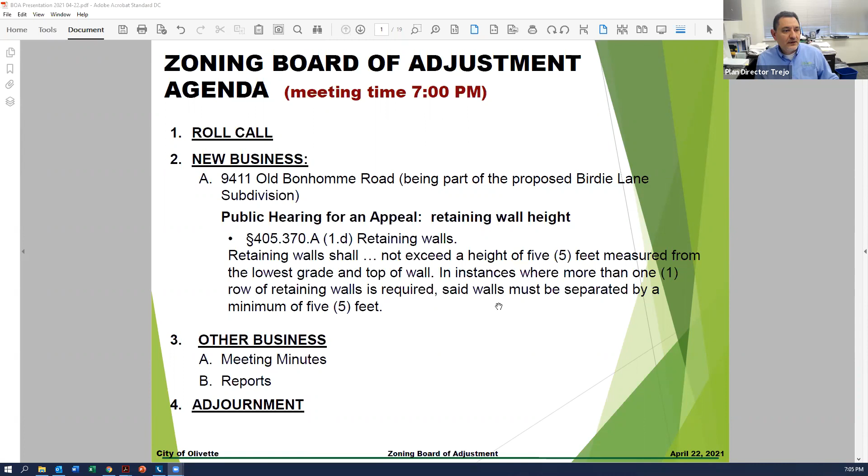Got it. All right, we have procedures both for virtual meetings and the Zoning Board of Adjustment. For virtual meetings, you can participate via Zoom or live stream. There's an opportunity for public comments prior to each vote. We ask anybody in the public to raise their hand for recognition - that's anybody outside of the petitioners. I will transfer you over as a panelist at the chair's request. Comments are limited to 3 minutes. When you speak before the board, please note your name and address.

The city urges you to have your video on when you speak. Public comments may be submitted in writing and read aloud by staff, and there may be a short delay in the live stream depending on your connection. For presentations from the applicants or petitioners, all reports and plans are accessible via the links on the agenda. Staff provides an overview, the developer addresses staff's comments and board questions, and all votes are now conducted as roll call votes, which is traditional with the Board of Adjustment.

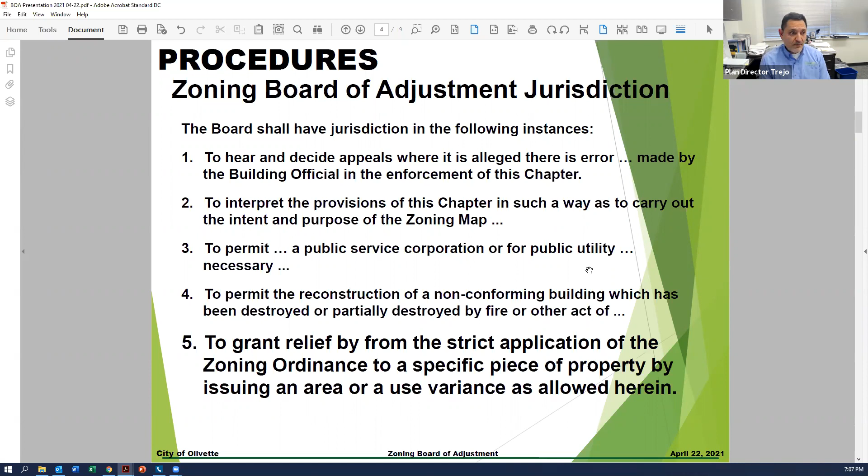Just a reminder for the board members regarding the procedures for the Zoning Board of Adjustment. You have jurisdiction to make decisions when there's an alleged error made by the building official in the enforcement of the code, to interpret provisions which conflict with the zoning map, to permit public service utilities, to permit reconstruction of non-conforming structures which have been damaged or destroyed, and more importantly, to grant relief from the strict application of the zoning ordinance to a specific piece of property by issuing an area or use variance as allowed within the code.

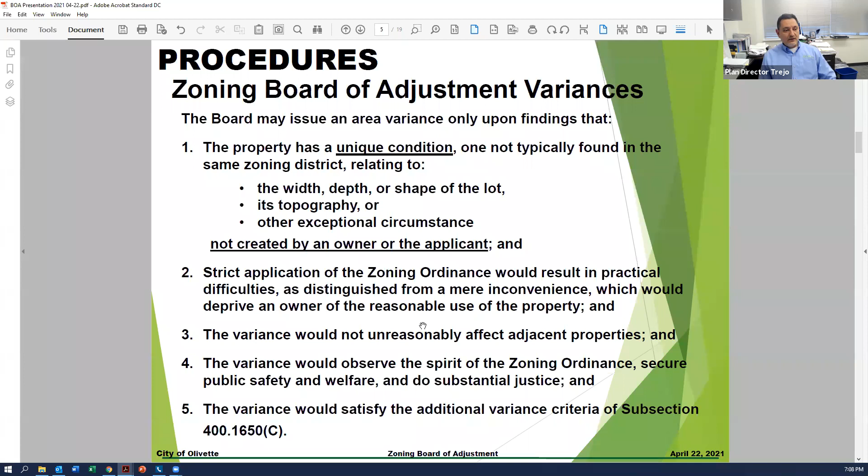In your review, you may issue a variance if you find that the property has some unique condition not typically found in the same zoning district - whether width, depth, shape of the lot, topography, or some other exceptional circumstance not created by the owner or applicant - that strict application of the rules will result in practical difficulties as distinguished from mere inconvenience, that the variance would not unreasonably affect adjacent properties, that it would observe the spirit and intent of the zoning ordinance, and that it would satisfy the conditions outlined in 400.1650(C), which includes consistency with the strategic or comprehensive plan and not impeding light or air.

Each appeal is always heard separately. The public hearing consists of presentations. First, staff provides information to the commission regarding the appeal and the code sections being addressed, followed by questions and answers with board members. After that, the petitioner is brought into the meeting to address the board, followed by questions and answers with the petitioner and board members, and then there's an opportunity for public comments. After the presentation, the public hearing is closed by the chairman, and the board deliberates among themselves regarding the appeal, asking questions of staff or the applicants for clarification as needed.

In order for an appeal to be granted, you need at least 4 votes. And of course, I urge that anytime the board considers a motion, the motion always be in the positive, as if you're going to grant it. Then at the time of the vote, you can decide whether you support it or not. All those wishing to speak, including staff and the applicant, must be sworn in, so please clearly state your name and address for the record.

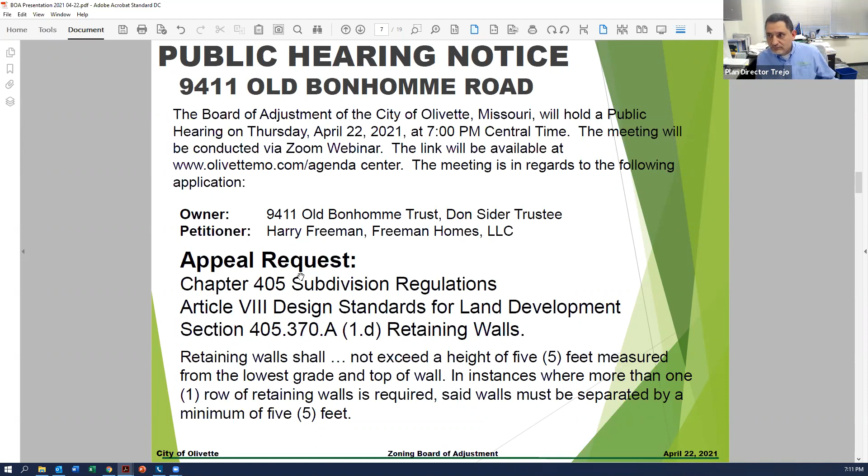So, Chairman, if you're set, I can go ahead and provide an overview of the application and the items.

Great, all right, I'm going to swear myself in. It's kind of awkward, I'm assuming it's okay, but I was telling the truth, the whole truth, and nothing but the truth, so help me God.

So the property at 9411 Old Bonhomme Road - its zoning is SR, Single Family Residential Zoning District. The intent of the SR district is to provide for construction of detached single family residences.

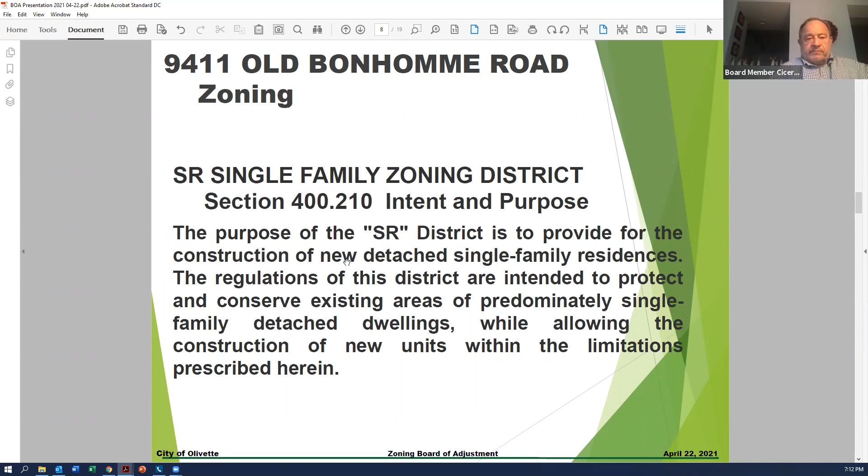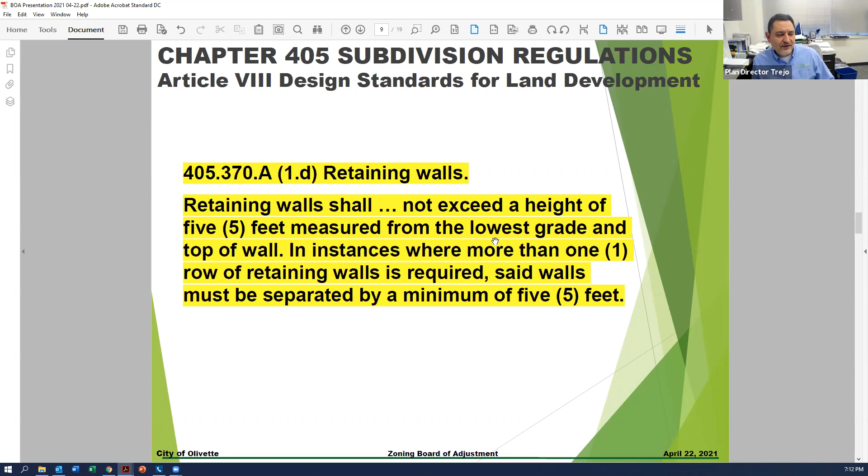The property is being proposed to be subdivided, therefore it's subject to Chapter 405, subdivision regulations, specifically Article 8, Design Standards for Land Development. If you have a retaining wall as part of that subdivision, it should not exceed a height of 5 feet. In this case, the petitioner has a retaining wall roughly 198 feet long, in which a good portion would be in excess of that 5 feet. I'll show you where that location is as we go through the slides. If you have any questions, please let me know.

The location of the property is 9411 Old Bonhomme Road. It's a very long property going north to south, addressed off of Old Bonhomme Road. The petitioner has acquired, or has under contract, the adjacent property to the west along with the subject property, and has submitted a preliminary subdivision plat to the City of Olivette to subdivide the properties and create 8 single family lots that run along a roadway to be placed along the east side of the property.

The two properties compose this area here that the petitioner is proposing to put a new street that runs north to south and subdivide the property into 8 single family lots along with 2 common areas. There will be a retaining wall roughly 198 feet here, close to the eastern property line.

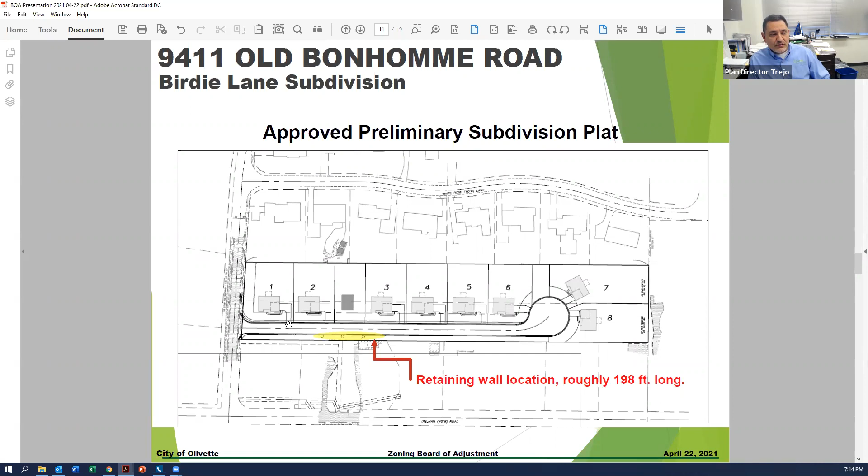This is the subdivision improvement plan that the petitioner is submitting, and again the retaining wall location is right along here. Old Bonhomme Road again goes up and down on your far left, Dielman here on the bottom going left to right. The retaining wall would be located right in this area - you can see it kind of straddles a portion of the second lot inward and then the third lot on that side.

As you look at the plan sets you received, you'll also note that the lowest parts of the property run right along here in the middle, and there's actually a small ravine that exists. That ravine is being channeled as part of the process, and it was also scheduled to be channeled by the Metropolitan Sewer District - meaning it was going to be piped underground.

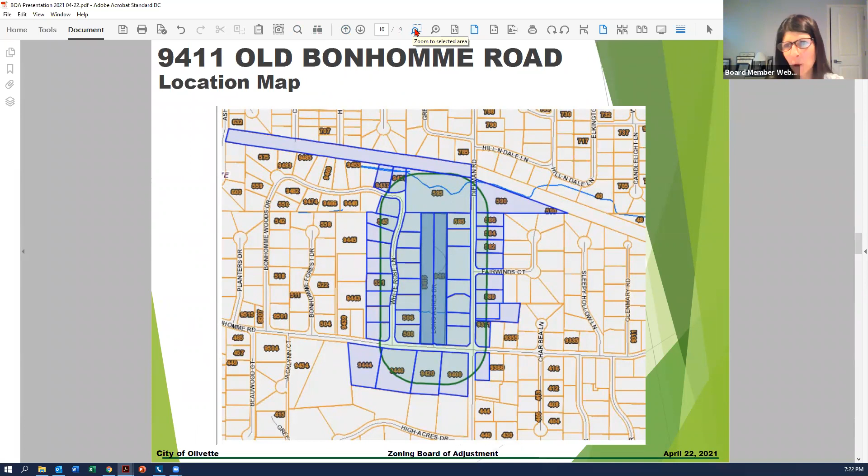So now you would be seeing a retaining wall, and you would see a deep section of the retaining wall, and it would V up, like you said. But on the street side, it's going to look like an even sized wall once they fill in the dirt.

Correct, and you won't even see the wall because everything else on top of the wall westward will be flat. So this is really what the neighbors on Dealman will be seeing in the end, along these properties here. Yes.

Okay, unless I'm missing it. Do we have any comments from those neighbors? I did not receive any written comments.

There were several comments during the process of the subdivision process before the Planning and Community Design Commission, more specifically concerns regarding stormwater and the drainage. But those are things that we're looking at in that process.

And you said they're putting a sewer line underneath there. They're doing some drainage. Yes, let me, bear with me one second.

In the county maps, if I go back there, the county recognizes that there is a ravine that crosses perpendicular to those lots, and that's the low point.

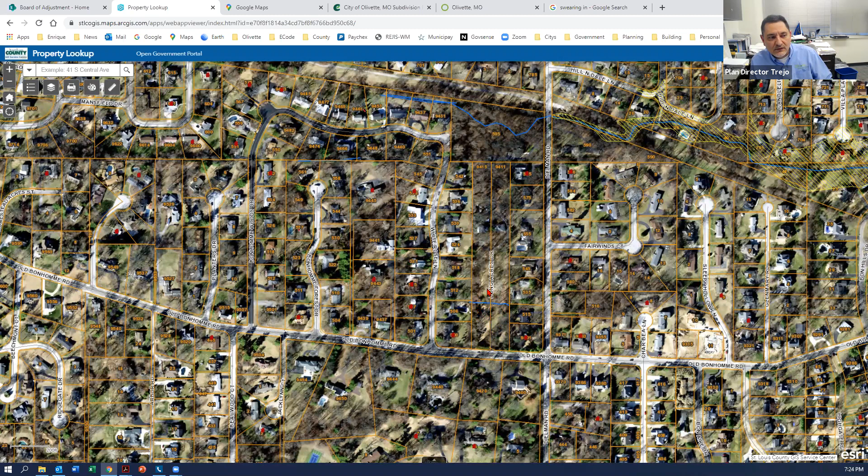So what they're doing is grading this area. There's a valley right here. That valley will kind of smooth out for the most part. Now they'll take advantage of that valley in one point, in the plans. They'll have a detention area on one side.

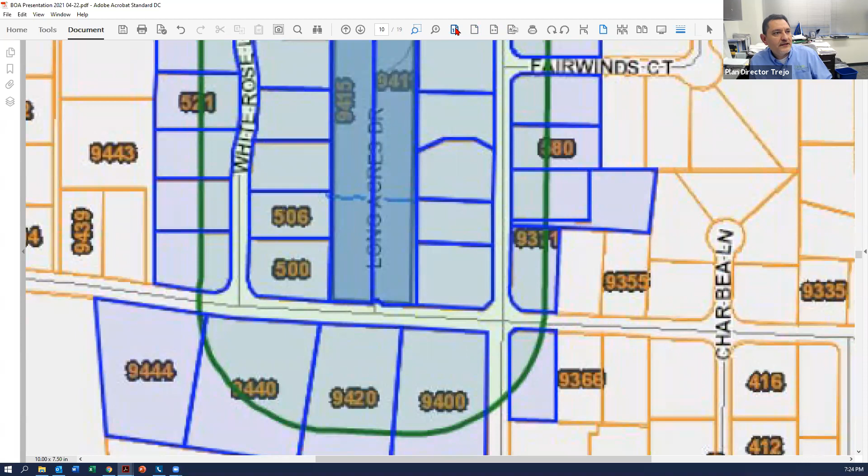Bear with me one second here. They'll have a detention area on one side and then the road going across. So this is low also, but it's a detention area. And then they'll have the road that runs across, and then the area here will kind of dip down.

So that road's going to be higher elevation than the land to the west of it? Yes, up to a certain point because it starts rising pretty quickly up here.

And currently, is there flooding or anything going on those properties? Is that the concern? No, we're not aware of any flooding issues that exist.

Through the improvement plans that they're proposing, one is that they'll provide the little ravine that runs through will get channelized, and secondly they will be providing detention areas on two sides of the property. That'll help minimize water jumping into the runoff and ending up in the lower area.

Carlos, I have two questions. One, if the roadway was lowered, if they had to stay with that 5 feet retaining wall and the roadway dipped down more, would that affect the capacity of the retaining basin?

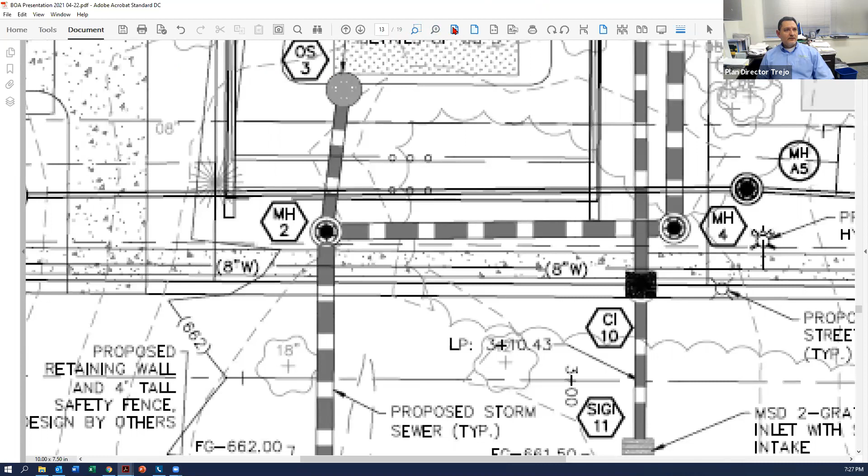And I'll get a little closer view. Just don't know how good it'll come out. You'll see the sidewalk, here's the street curb that runs through here, then there's the sidewalk. Let me see if I can annotate.

This is the edge of the street here. Then there's a curb and then the sidewalk runs up to here. And then the property kind of dips down from that sidewalk along the edge. It can't dip too fast, and the elevations look like it goes down about 6 feet on this end to this point, and then at the lowest point looks about 9 feet.

That's the common ground, right? They're not building on that. That is correct. It's common ground.

Okay, then the other question is, I believe there's a guardrail along the road. Does that guardrail need to have some distance between the retaining wall to support the posts? Correct. Well, that's a good question for the petitioners. The building inspection staff is currently reviewing that.

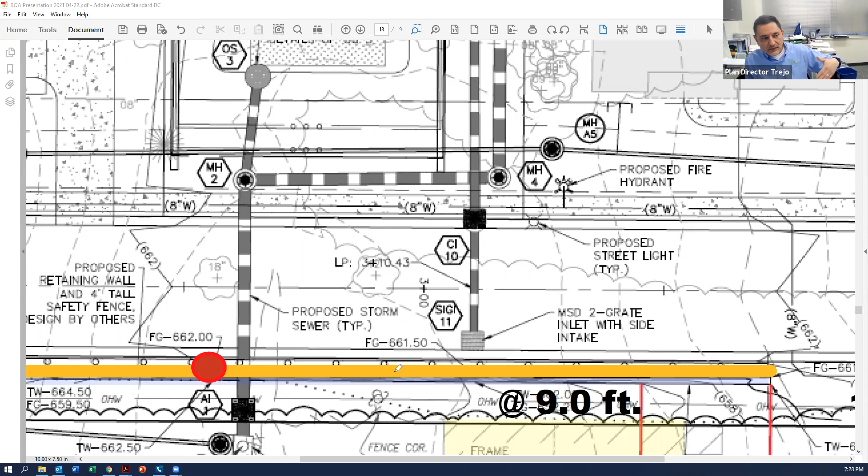Right now it's kind of shown right adjacent, but the way I have this blown up is probably closer than what it looks. But there will be a guardrail that runs the length of the retaining wall.

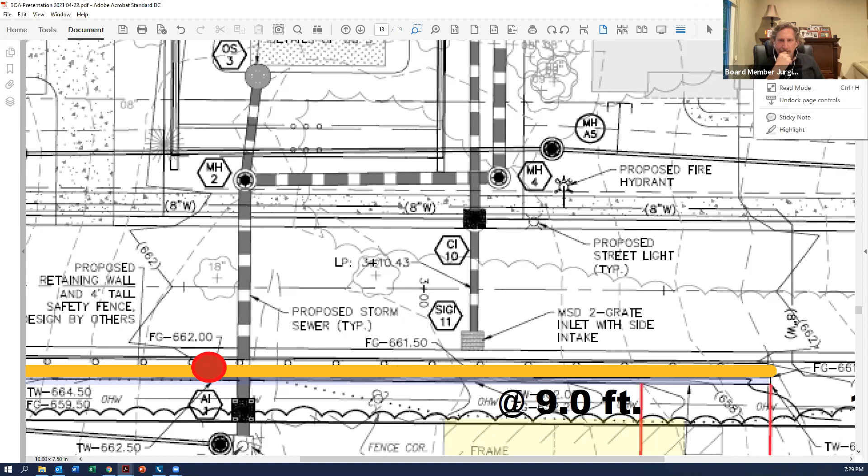And then with something that's 10 feet tall, it's going to be like an attractive nuisance to kids, especially. So I'm assuming they're planning to put some sort of fencing around that.

Along this end, not the retaining wall necessarily, nothing that's been planned or requested from our end, because odds are that the property owners here along the eastern side will make use of that common ground area. I think by code there is some landscaping that is required, but because of this frame garage, I would be hesitant that they restricted somebody being able to go around that.

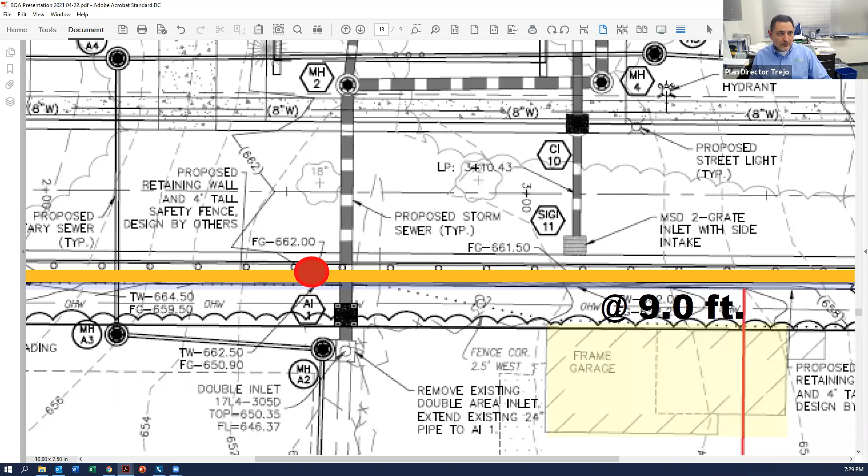But a 10-foot drop's pretty big for kids, especially. Yes. Yeah, I guess I'd be curious to see if this is, yeah, the kids, that's a good point. That's a pretty deep drop.

Trying to picture what that would look like on the property, on the west side. Doesn't it indicate the safety fence here? I'm seeing some indication of a 4-foot tall fence. There are some notes on the plans. Is the safety fence, where's that located? What are you reading? Oh, it's a proposed retaining wall and 4-foot tall fence.

Oh, I see, that must be it, denoting that it's going to be there. Yeah, I see that. Am I misreading that? It's in a couple of locations, right here, and then up to the left of the red dot as well. Yeah, they have an arrow that points, yeah, well, that makes sense.

That's good. Okay, so here, and just to make sure, thank you, Adrian, for catching that here. Let's see. Right in this note, it notes that this right here is a guardrail. And then the notes here note a safety fence, a 4-foot tall safety fence, being on the back side of that retaining wall.

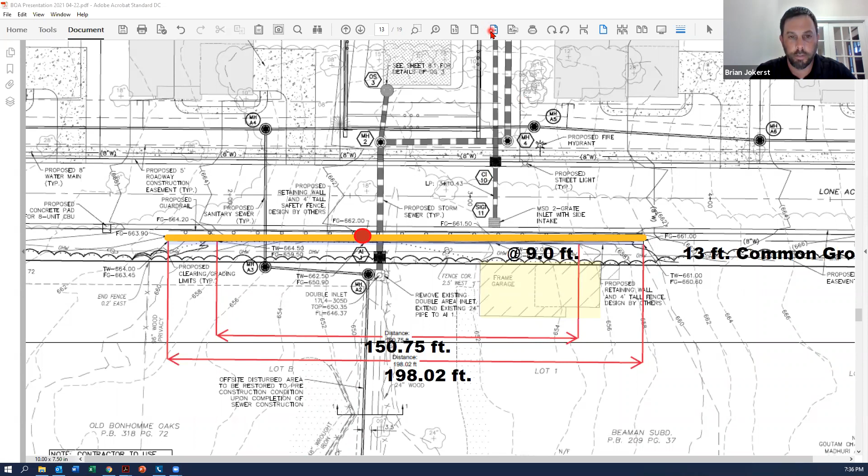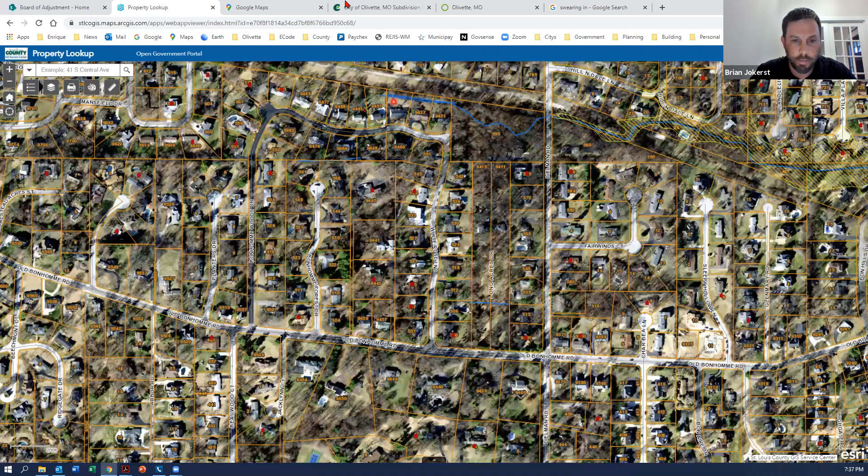And then how tall is that framed garage? I am not sure on that, but just by looking at it, I would say it's 9 to 10 feet, probably. 8 or 9, probably 8 to 9 feet, I would say. Just guessing.

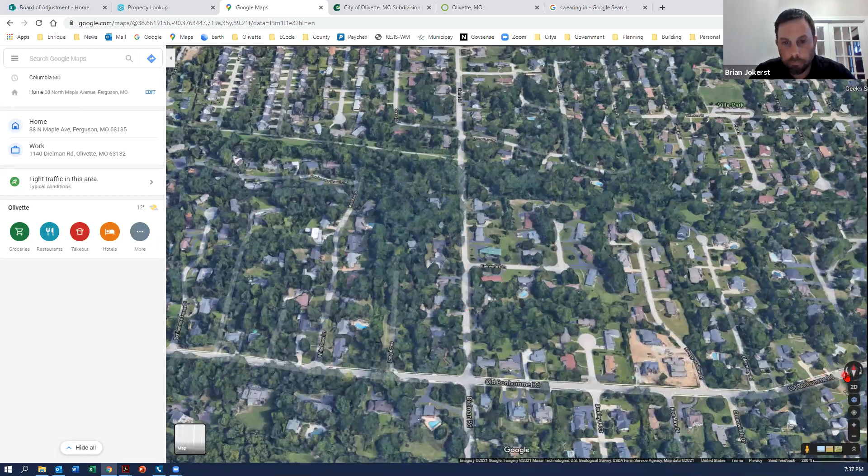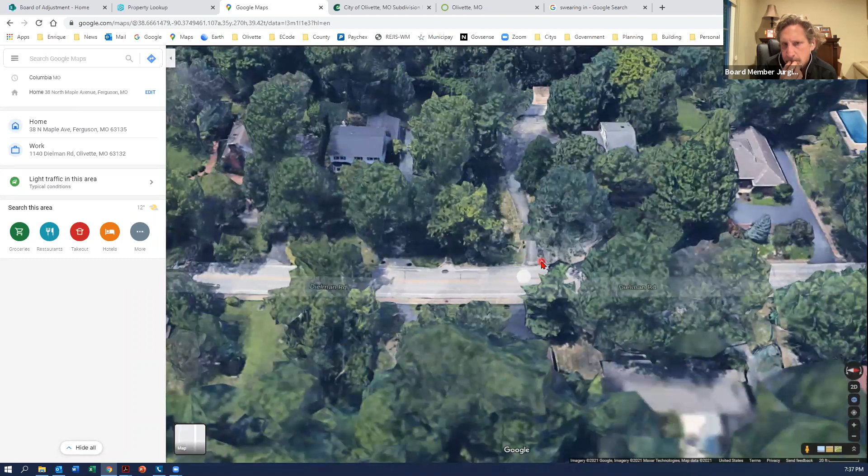And then how far away would that retaining wall be to the existing houses? So it's roughly, as Carlos said, 9 feet on our property, and then you're talking about the existing houses on Dielman. I would say it's a pretty good distance. I don't know for sure right offhand, but I would guess 40 to 50 feet. And then you're also planning on putting some landscaping in front of that wall? Yes, we will be leaving any of the existing trees we can salvage along that property line, and I believe we are adding some additional trees along there on the landscape plan.

Chairman, just for reference, this right here, this 3-bay garage that you see off of a streetscape from Dielman, or Google view from Dielman, is right here. It actually looks taller than that, especially the peak.

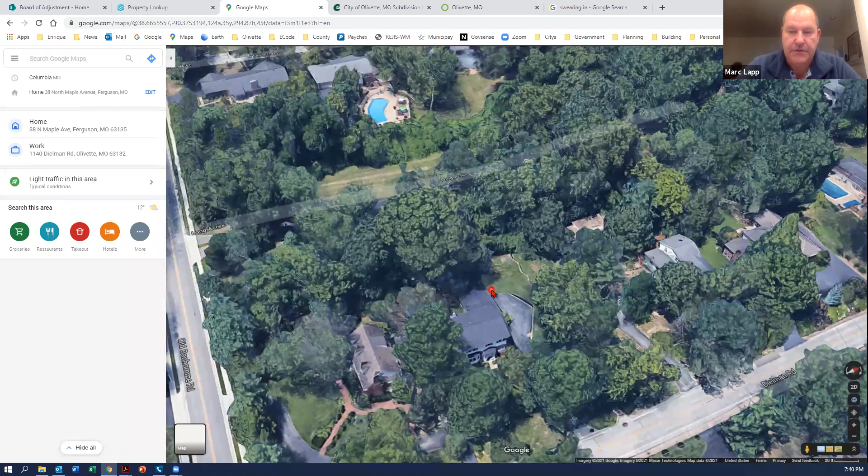Thank you all, I'm Marc Lapp. I live at 515 Dielman Road, which is to the south of the property with the garage on the property line, so my view of the retaining wall would be the first half going south to north. I understand the project. I built my house in 1993 in anticipation of that whole area being developed, so it does not come as a surprise. But it is something that I will have to look at, even with landscaping, and that won't be an issue ultimately. But I'd like the expertise of your committee to tell me that this solution is a necessity rather than an inconvenience. For example, could the first half of the wall from south to north be in 2 5-foot sections? And then further north, let that be 11 feet at the heights because it's hidden by the garage.

So that's my only question to you. I want to be assured by you that this is a necessity rather than an inconvenience.

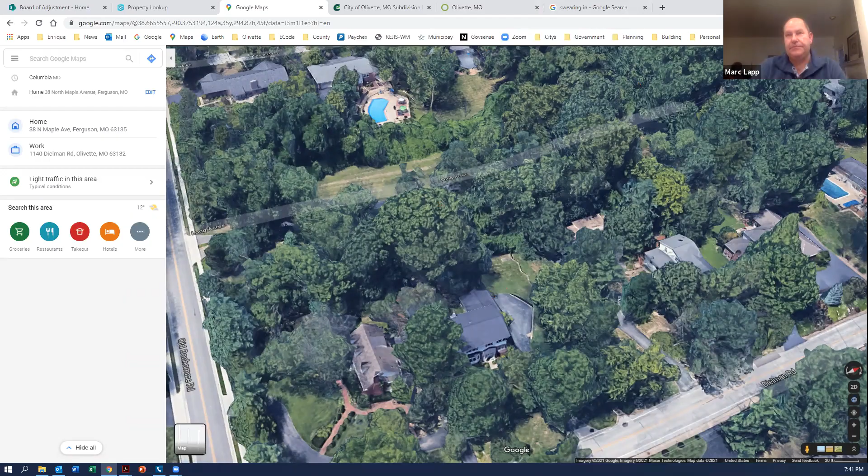Okay. Anybody have any questions? Is there a response?

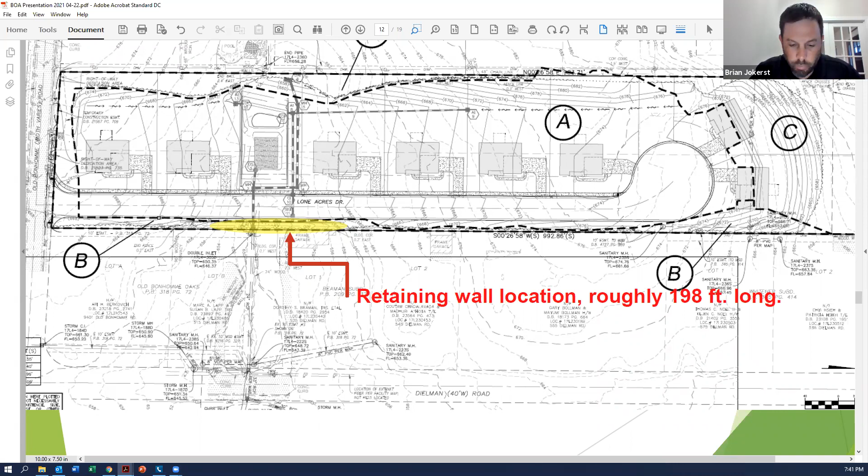Yeah, I think, Brian, I'm sure you've discussed this with your civil engineering members. I just don't know. We've looked at if we could do two walls for the whole length, and I just don't know. I'd have to have them look at doing it for only a portion of it. I just can't picture how that transition would go for sure, from having two walls and then switching back to one.

It's something we could look at, but I don't know if that transition would work, because at the point where the red dot is, the deepest point, I don't know how we would switch from having two walls to one at that point. I guess the one wall would have to tie back in. I personally think you'd have to have two walls the whole length.

But I do think, how much space would you need between the garage and the first retaining wall? Then you've got the 5 feet for the second, and then how much distance do you need between that and the guardrail? I think we have 2 or 3 feet from the guardrail to the first wall, and then we would have to have the 5 feet between retaining walls, and then also the 1 foot or so of the wall thickness.

So that would only leave us with, it would almost put us right up to that existing structure. It wouldn't leave any room for maintenance between that wall along the garage and the face of the garage. And I think you might do damage to the garage. Yes, I think that would be another concern.

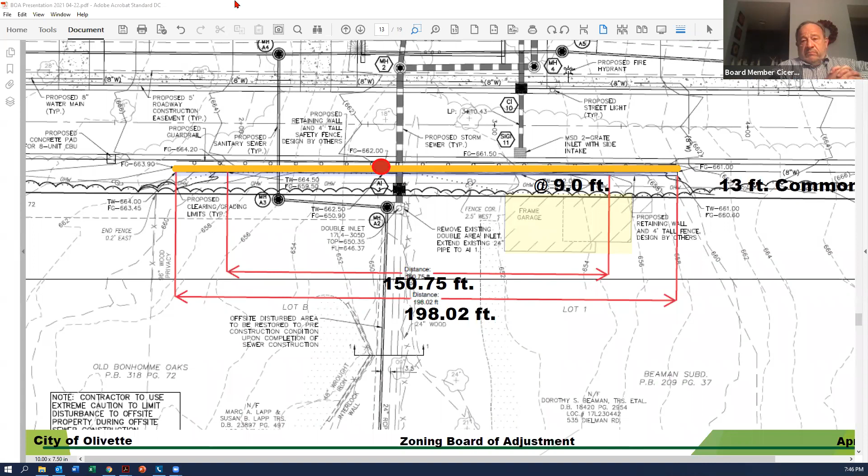Do you need a motion? Well, let's hold on, let's talk about it first. Yeah, all right guys, what are your thoughts? Don't all speak at once. I'll go first. Perfect, I knew you would. I haven't been here in a while, so it's my turn, right?

Good, exactly. So when we start looking at these variances, I always try to go back and go down the different points. And I do believe this property presents a unique condition, as well as the adjacent property having that garage right on the property line. So I do think it meets that requirement. I do think it would be very difficult to deal with this, and I just don't see how it could be practical to actually use the two walls. So I do think it does result in practical difficulties.

I don't believe there's a major effect to the adjacent properties, but I think there are ways to mitigate it. I do like that they have that safety fence there, and I like that they have space in front of the retaining wall to add some landscaping. I wouldn't want to get too close to that existing garage and potentially cause some damage. I think they're addressing public safety and doing a pretty good job of mitigating the issue as much as they can. So those are my initial thoughts.

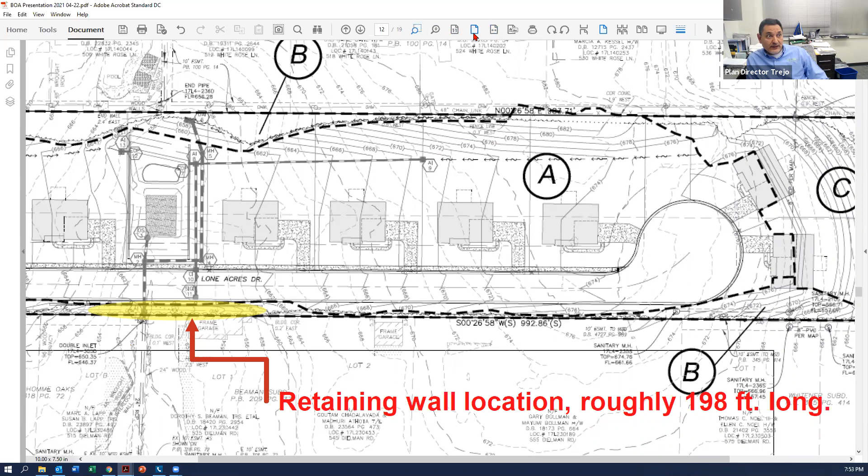This is the ideal placement of the roadway, keeping it as far towards the west. This yellow shaded area where the retaining wall is, there's a common strip of property that runs parallel with the road. The code requires it be 10 feet wide, and they're proposing 13. But that doesn't have anything to do with the retaining wall. So they've shifted the road and the properties as far west as they could.

Carlos, I'm going to put you on the spot. What is your take on this? Is moving forward, dealing with the retaining wall where it is, the best plan? Or is it something that needs to be broken up to meet the code?

In terms of the variance, I would look at it that the issue is more in terms of the design and engineering impact that the design would have. If that frame garage was not there, could they step that?

Yes, they could. Given that the frame garage is there, and again that's pre-existing and no fault of the zoning board, one of the unique things on this property is that there's a valley right there. As you pass the bike trail on Dielman, you start going downhill and then come back up towards Old Bonhomme.

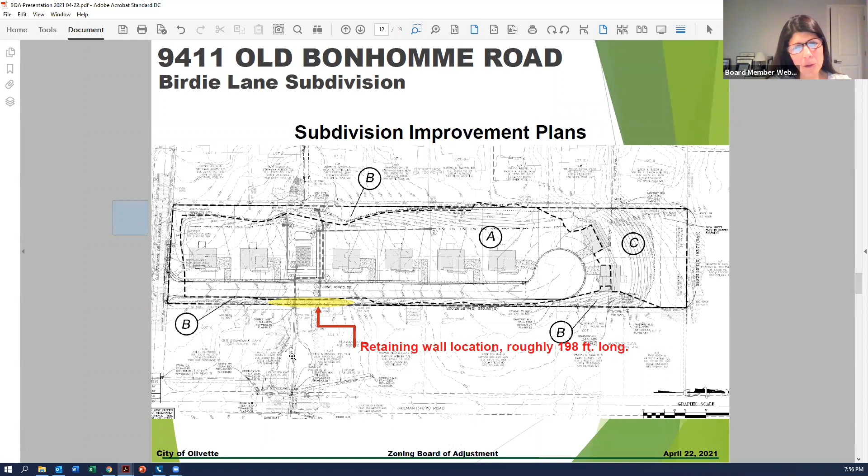Got it, let me go back one. So to show you the retaining wall real quickly: you see how the 2-foot contours are for the most part equally spaced as they're revised, but you see how tight it gets here on Dielman Road. A new road shouldn't be designed to have that steep of a drop, and that's why they maintain that.

It's not like you want to give a variance to all those properties to shorten that lot length by 5 feet or something—the setback—so the road's not so close to all the homes, the properties along Dielman.

I mean, did they consider getting a variance on the lot size for the whole subdivision so the street wasn't so close to the back of those homes? That I am not sure. It's not anything that we brought to their attention or advocated for, because on paper it's the difference between one variance versus multiple variances, which would probably be more difficult.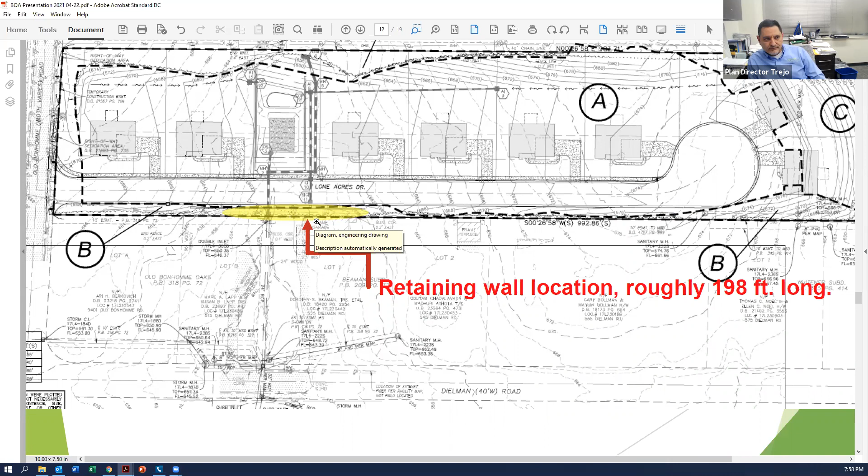I don't understand what we would gain if they moved the house. I'm not quite sure how that would work. You'd lose more than you'd gain, right? They can't move the street further west by a few feet. Aren't you losing more than you're gaining if you go that route, granting more variances and creating a more unique situation? Definitely, more than just simply installing a wall that's tall enough, covered by landscaping with a safety fence.

It seems like a very practical solution to the problem, where all options were explored. Looking at the conditions for granting a variance, we really do meet 5 of the 5. It's sort of a unique situation, and this improves the area. This seems to be the only reasonable path. I would agree with that.

I would too, but we can think of 3 different things that we could maybe do. I have a feeling all 3 or 4 of those different things we could do would be way worse than this. I would agree.

I think the retaining wall, looking like a nice wall that instead of being 5 foot high is 6 foot above where it should be, covered up with an arborvitae or what have you - I like to look at that. I don't mind looking at stone, and I don't mind looking at trees. It's personal preference, but for the conditions we have to grant a variance and considering other options, I don't know what else one could do.

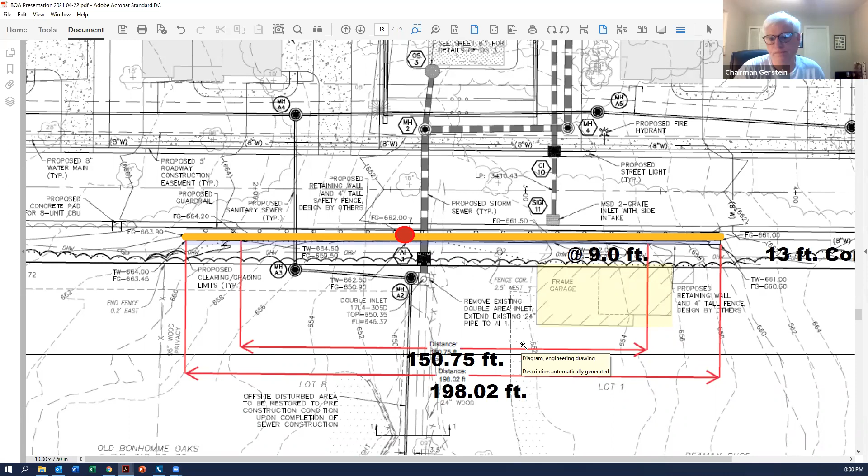I think we're ready for a vote, but we need a motion. I'll make a motion. And I'll second it - haven't heard the motion yet, but I'll second it anyway.

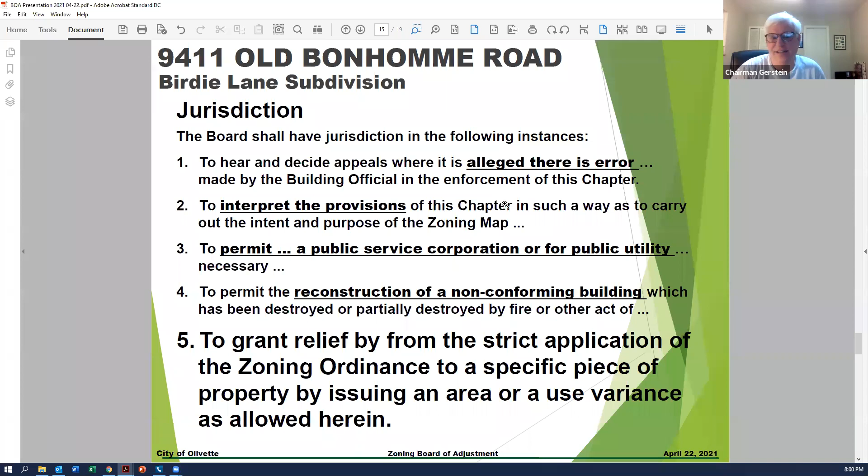I'll make a motion to grant a variance from section 405.370.a subparagraph 1D to permit a retaining wall in excess of the maximum 5 feet, but at no point exceeding an additional 10 feet, as submitted and illustrated in the Birdie Lane subdivision improvement plans dated March 1st, 2021, as presented before the Zoning Board of Adjustment and noted in the staff memorandum dated April 22nd, 2021, and subject to any staff conditions herein. Now I'll second it.

Thank you. Carlos, can you call for a vote please? Board Member Weber, Yes. Board Member Hartman, Yes. Board Member Jurgel, Yes. Board Member Cicero, Yes. Chairman Gerstein, Yes. The motion passes unanimously 5-0.

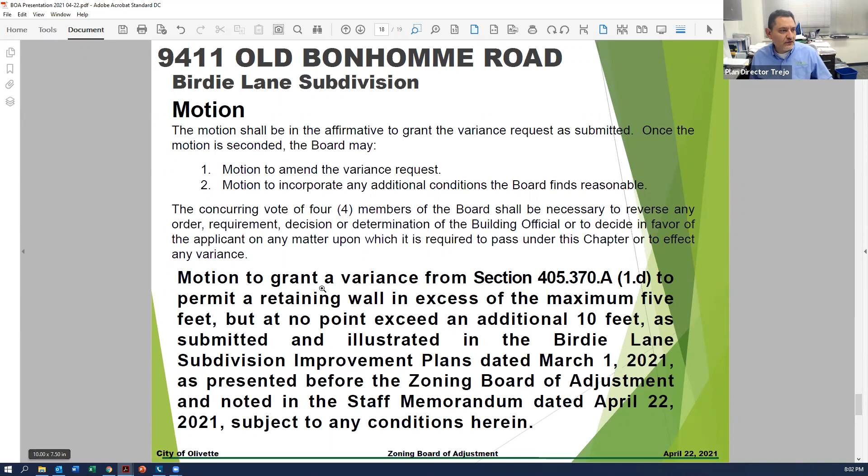These plans are still under review by staff. We can have conversations with the petitioner as they get closer to finalizing the landscape plan and the actual materials that would be used for the wall. If there's opportunities to create a green wall, we'll take a look at that too. And we'll coordinate with Mr. Lapp, because there are public utilities that are going to be opening up some of that area that are not associated with the wall, and those are being done in dedicated easements.

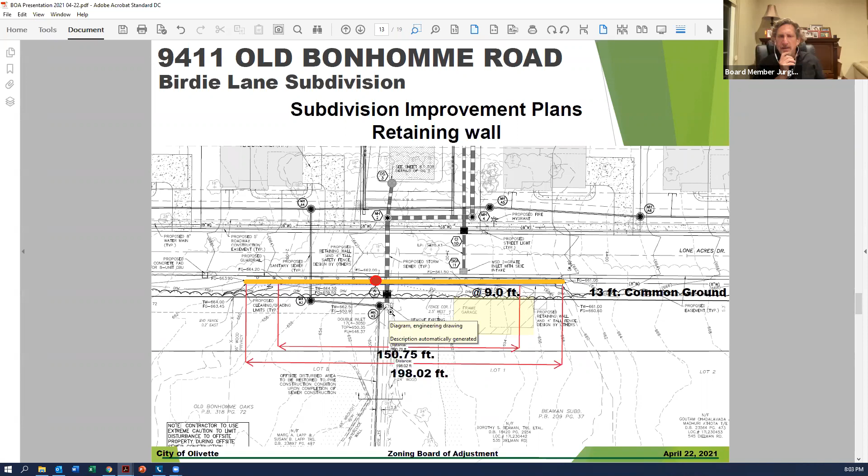Again, we'll coordinate with Mr. Lapp and then get back to the developer to look at what landscape options are there and what best plantings would be warranted, because there are overhead wires and there's going to be underground pipes. So you can't have anything that's going to grow too tall that starts impacting the overhead wires, and I've got to get a better understanding of what those are. We'll coordinate with Mr. Lapp on that, as well as the other adjacent neighbor too. Absolutely. Okay good, and you can see the wiring that runs across here.

Anything else, Carlos? Do we have to go over old business or anything coming up? No, that'll be it, Chairman.

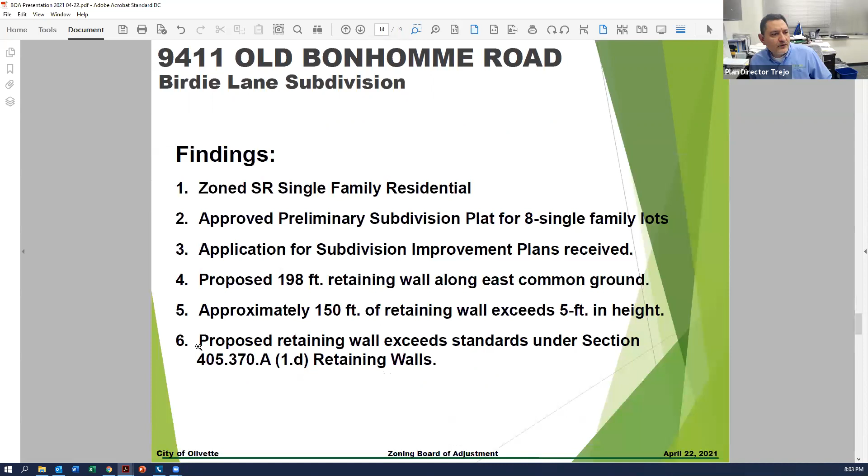I'm not sure if everybody's aware that Jonathan had resigned. I think I had sent out notices. He got a job with the city of St. Louis. Great opportunity for him. He was a great person to have. Sorry to see him go. He's a really good guy.

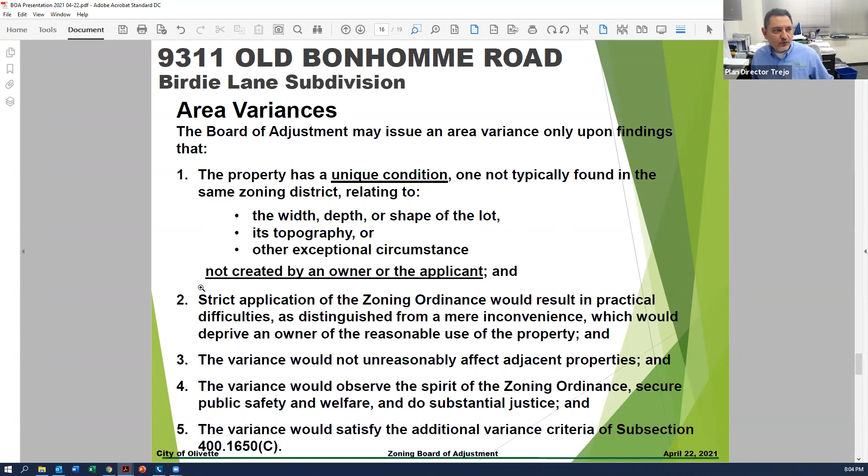But we should have a new planner on board by early next month, and be back to full speed. I do have a request for a variance that we're reviewing, and I'm asking the board - ideally to help expedite it for the petitioner, May 27th, if they want to pursue it, would be ideal. Our regular meeting date would be May 13th, but I'd be running it really close to the posting deadline. So I wanted to gauge the interest or know your schedules on that.

And then the other thing is several members brought up the start time, if that's something the board wanted to consider - 6 o'clock. I'm for it. I could do 6, and I'm good on the 27th. Same here. I'm good on the 27th too. I'm ambivalent about the time, but I'll go along with the majority. So the 27th is fine, and 6 o'clock? Yeah, that's okay.

If there's any questions, development still continues on the Olive Corridor. Just real quickly to bring you up to speed: up at I-170 Olive Crossing, they changed the master plan to add a residential component, which caused a delay. They had to go back to the Tax Increment Financing Commission, and that's scheduled to go before the Plan Commission in late May or early June, then be approved by council.